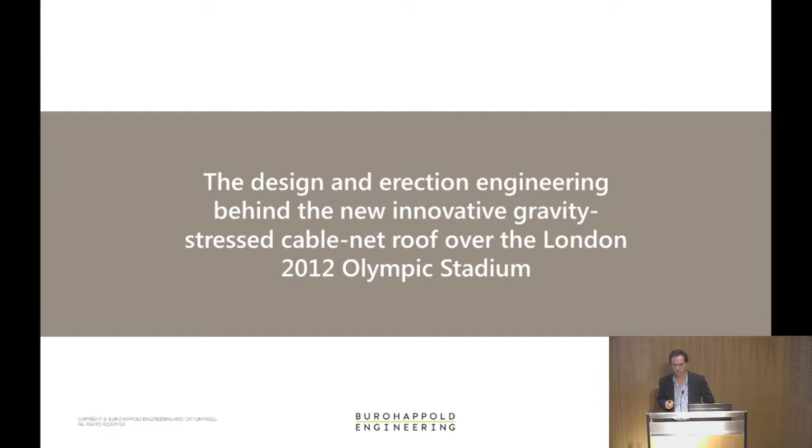My first slide is a question: how do you double the size of the Olympic Stadium roof? On its own, that's a fairly challenging question and challenge. However, you'll soon see that it wasn't just the question or the answer that was difficult. The question proved to be a little more convoluted than that along the way.

I wanted to bring you back to the heady days of the Olympics first. So it's 2012, and everyone's very excited by what the UK have been able to produce and deliver. I personally found it a real pleasure and pride to look at the Olympic Stadium being used and know that we had been part of that.

You probably also know that the original brief of the stadium was for an Olympic Stadium, a summer event stadium. The brief was that we would have a summer event where 80,000 people would be able to come and watch the Olympics. You would then go into legacy mode beyond, where 25,000 people would be able to watch further athletics events. It was to be delivered as an athletic stadium going into the future after being reduced in size to 25,000 people.

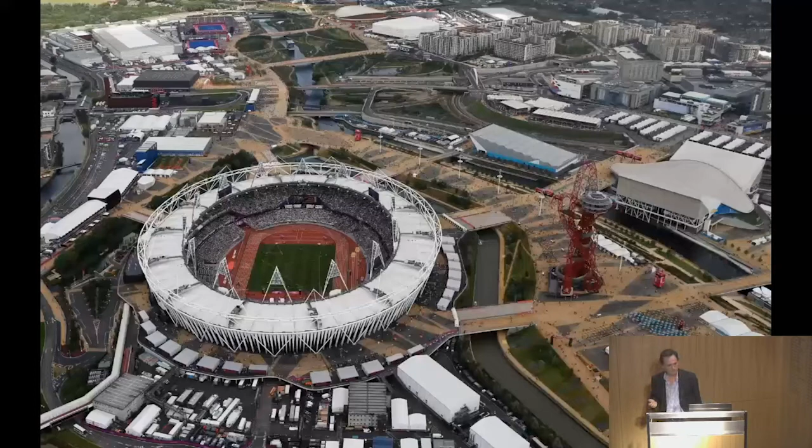So the response to that design brief was a stadium that looked very much like this. Down in the lower bowl, we had 25,000 seats. They were permanent, going to stay there for the full period of the stadium's life. We then had 55,000 seats in a dismantleable upper bowl, and there were thoughts about passing the upper bowl on to the next Olympics, letting it pass around the world as Olympics went on. Obviously, that hasn't happened. So, interestingly, we're going to talk about the roof today.

Now, the purpose of the roof wasn't to keep these guys dry - it was meant to be a summer event. The purpose of the roof primarily was to ensure that wind speeds within the athletics stadium were at a level that meant that when Usain Bolt broke the world record or whatever he was going to do, it stood - it wasn't disqualified for being over the 2.0 limit.

So we had a stadium like that to begin with, but even before this was in use, even before the games, the public and political machinations were moving at such a pace that people were beginning to say, you know what, we quite like this. It's a great stadium. We don't like the idea of building something that holds 80,000 people and then knocking it down. Unfortunately, or perhaps fortunately depending which way you look at it, there is only one way in the UK to make such a stadium not be a white elephant, and that's to say that Premiership football will be hosted there and find a tenant to play Premiership football there.

And if you're going to try and host Premiership football, you need to cover all the seats, which is where our story starts. So even before the Olympics were complete, we were beginning to look at options for covering all the seats in the stadium as it stood. And this is where the story begins.

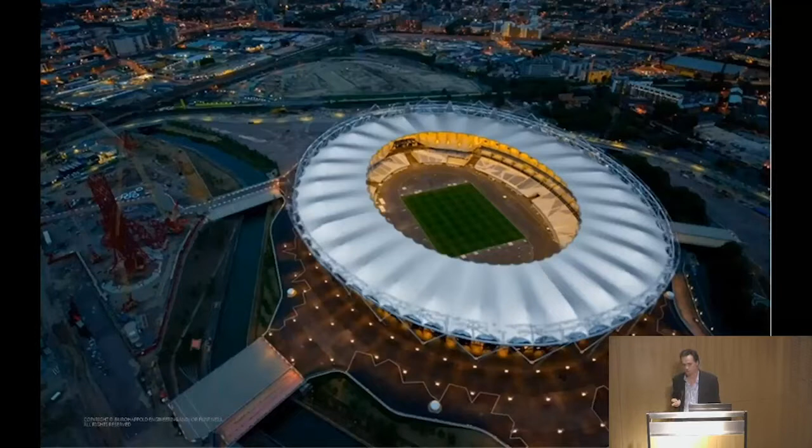One of the first reasons why that had to change was the whole political landscape keeps moving forward, and Spurs and West Ham fight it out for the tenancy rights, and West Ham eventually come out on top. Alongside that, the public are beginning to realise, oh right, we're going to play football here.

Great, it's still - we like the fact it's still an athletics track. That's right and proper. But the message from all around the world is that you can't play football with an athletics track - that just doesn't work. Particularly West Ham supporters are saying we don't want a stadium that loses its atmosphere.

So to create a stadium where football can be played, you have to start thinking about moving seats. So rather than suddenly having a situation where we just had to cover all the existing seats, we now have a situation where not only do we have to cover all the existing, but we also have to cover seats that have now moved in all the way across the athletics track. And so the roof's getting bigger and bigger and bigger. Add to that...

A requirement to host concerts, other events of that nature, and suddenly rather than having a lightweight roof, there's a quest - well, can we begin to insulate it? Can we begin to acoustically insulate the stadium and prevent some noise spill out? So, having moved to a much longer span, we're also now adding a lot of weight into the roof. So it's all the original premise of 'can we double the size' has moved on and on and on.

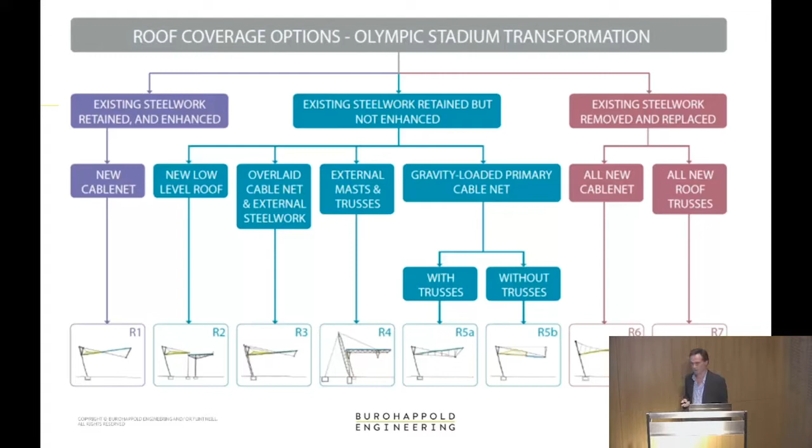Or these two options, and this is where we're going to start concentrating. Rather than telling ourselves that we've reached the limit of what the compression truss can do, we say we've only reached its limit with regard to horizontal loads. Is there a way we can reuse the capacity of the compression truss with regard to horizontal loads and carry the greater vertical loads that are now appearing? That's where we're going to move towards.

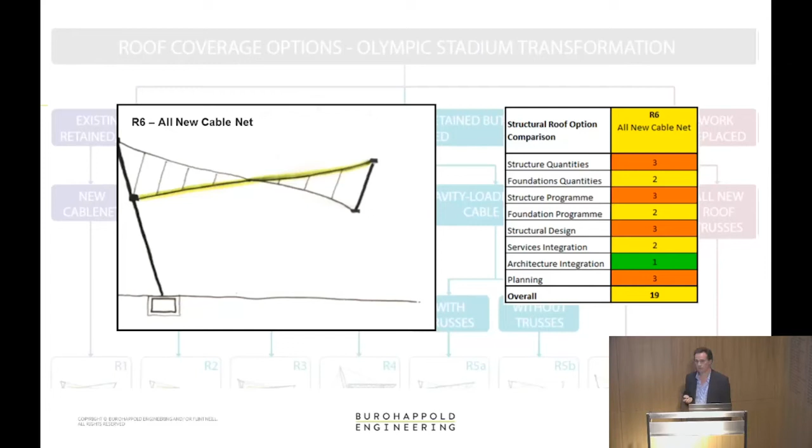It was absolutely right at this stage that a whole lot of options were scored with regard to a whole series of parameters. Some scored very badly, others, not the solutions we arrived at, scored pretty well, but weren't particularly well favoured with regard to the idea of keeping the original. Whereas coming to a gravity-stressed cable net system began to score very highly indeed, with structural design complexity being the only point where it dropped down. We couldn't let that be the reason we didn't do it.

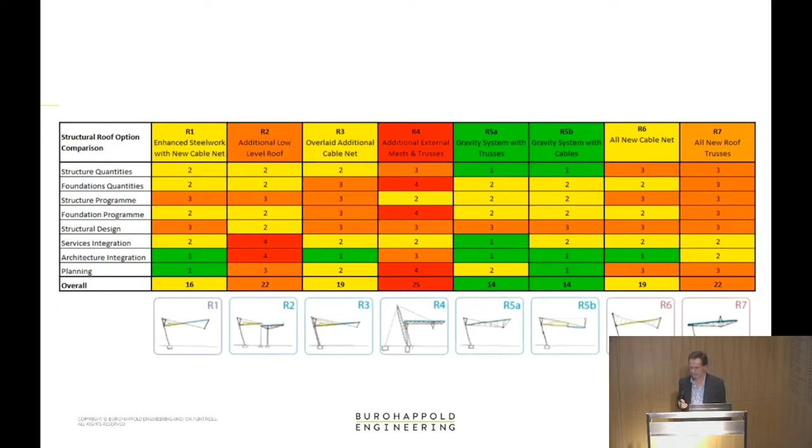So, as I say, we created a chart, presented that to the client, and it became fairly clear alongside Populous, the architects, that we could work together towards the solution everyone wanted through a gravity-stressed cable net system. I think it's the right moment to stop the story and just explain briefly what we mean by a gravity-stressed cable net system.

Most of you will be fairly comfortable with the fairly ubiquitous cable net roof system, analogous to a bicycle wheel. We have a compression truss that is like the rim, a tension ring that acts like the hub, and a series of cables acting as the spokes, putting compression into the compression ring and tension into the tension ring. The reason behind that is to carry vertical load, and the way it does so is by resisting uplift within the pre-stress when the cable runs upwards, and resisting downloads by that same pre-stress.

So what you're doing is introducing pre-stress horizontally in order to cope with vertical loads. The cables are inclined upwards and downwards to carry those loads. The move we then decided upon was, rather than having this system of cables, in the original we had a downwards cable pre-stressed against an upwards running cable, meaning upwards and downwards loads could be carried, balanced by the pre-stress.

By dropping the whole system down, we suddenly have a situation where both cables are resisting gravity vertical loads, and they're also at an inclination where they're doing that more efficiently. So the horizontal loads required in this system to carry gravity loads to begin with are equivalent to the horizontal loads in the previous system.

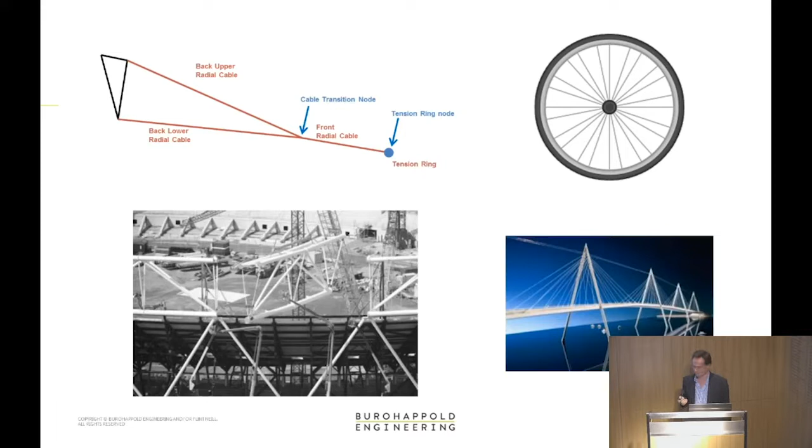And so this is what we ended up with. It's obviously very significantly longer, very significantly heavier, but by dropping the whole system down and having both cables acting against gravity, and removing the pre-stress required to act against upwards and downwards loads, we've reduced the horizontal loads back to a similar situation.

What you've probably worked out is that although we've reduced the horizontal loads, the vertical loads are still vastly increased from the original. What we found, and what Chris will describe later, is that although we managed to ensure none of the members within the compression truss needed to be changed or strengthened, we did require almost all of the columns to be replaced.

And so part of the whole construction process was to swap those columns out individually, which is quite an entertaining little bit of work as well. I probably ought to say at this stage, and Chris will say later, that although all the members were satisfactory and didn't require strengthening, a number of the connections did require strengthening, and that work was also done.

And what we're left with? Well, we're left with a system where it's quite a clear hierarchy. We've got a set of existing compression truss and columns, although the columns aren't existing. That has a series of a cable net applied to it. That cable net is stressed into position by a steel rafter system.

Now, at this stage in the design process, it's important to note that we had intentionally ensured that the steel rafter system purely spanned radially and provided a set of dead loads to the cable net system. It wasn't trying to act structurally on its own, apart from spanning. And in order to make that happen, it took on a folded shape. On top of that, with a series of purlins, and you can begin to see the folded shape of the roof, and finally the cladding.

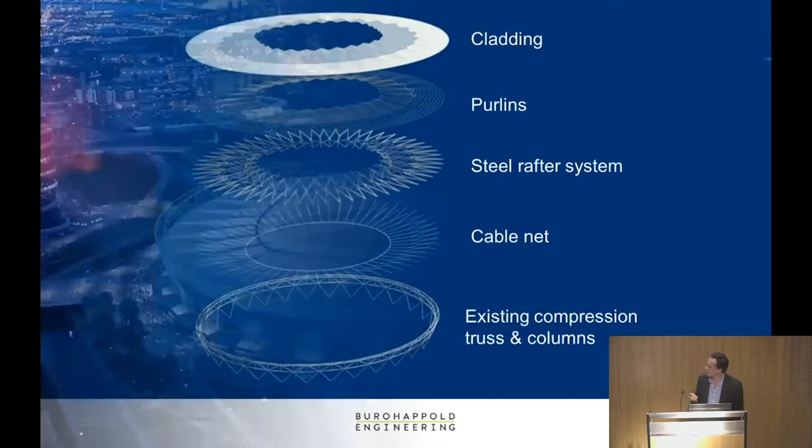So, if I then move on, that's where we had got to, and we were all very happy with this. It was a nice roof. It fitted with what Populous were aiming for. We were comfortable we could make it work with the existing compression truss.

This was about April 2013, and so on this timeline, we've obviously skipped all the way through the Olympics. We're just coming up to the last event that would be held before the chosen contractor would come and start dismantling and converting the stadium. So we're getting close, and the contractor comes on board. We get a full costing done of the situation, and there's an affordability issue.

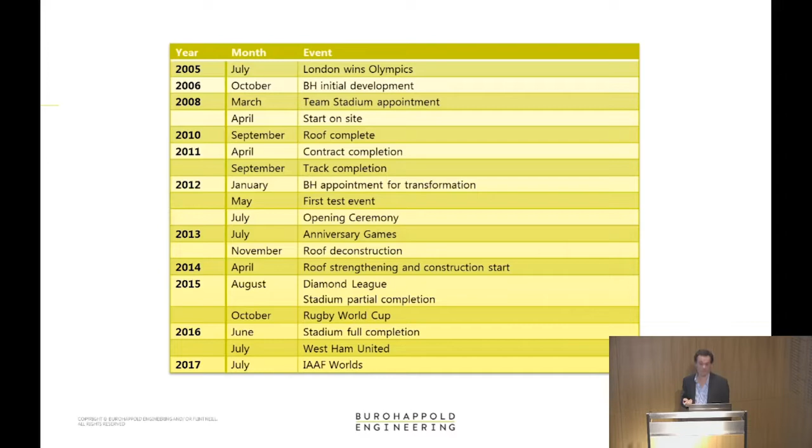So a lot of people have to, again, scratch their heads very hard and look back at what we can do. And the outcome was to look at what we had and say, well, actually, there are some complications here.

The idea of trying to ensure that the rafters don't pick up any load, or the steel roof itself doesn't pick up any additional parasitic loads, maybe isn't quite the right option. It's given us a lot of complexity in the folds within the original roof. So what can we do to simplify that? And the answer came in the form of a flat front roof.

It's actually quite conic in its shape, and so it becomes a structural element on its own. So it begins to bring in some efficiencies in those elements. They're actually doing more than just spanning radially.

We also then introduced a separation, and this is quite an interesting item. It meant that the front roof could act in that sort of diaphragm way as a cone, but the rear roof remained simple. So the rear roof just sits and loads the cable net system on its own, and you'll see through the diagrams and through the construction sequence that worked out very well.

It also meant that at this point we were having quite serious difficulties with the connection between front and back roof. The forces being generated at that point were substantial. That was causing a significant connection to be required, and that was one of the elements pushing costs right up. So by flattening out this roof, beginning to let it act in a structural fashion, and separating it from the back...

Suddenly we were beginning to get the steel tonnages a little bit lower, and also took a bit of complexity out of the whole system. And contractors were scared of complexity, so that's part of the reason why the costs were high in the first place. So where have we got to then?

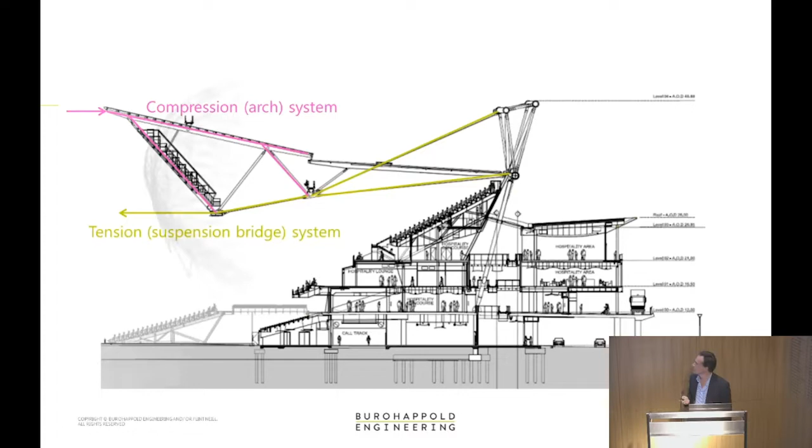This is the point where either you'll decide that was the interesting bit and go to sleep for a bit, or you've been holding out for how did they do it, how did they do the analysis? In which case, you might pick up.

It's obviously a very complex roof, a system that's absolutely interacting in all sorts of ways with itself. It's not something you can sit and take a cross section and design fully from. It's important to draw the cross section and the structural system simply, but to really get to the bottom of whether this works, whether it stands up under snow loads, wind loads, and everything else, we've got to create a complex model, and we've got to bring our architect along with us.

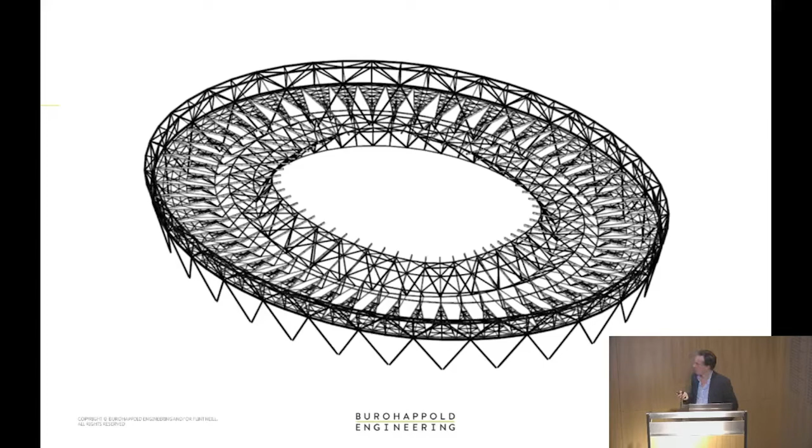One of the primary tools that's made this possible is parametric geometric modelling. This happens to be Grasshopper, though there are other ways to do the same. This scripting allows us to control and reproduce full geometric models from a series of inputs - a few slider bars, a definition of the level of the drip line, the level of the cable net, how many purlins you want. We're able to tweak the input, and a whole new stadium geometry is produced.

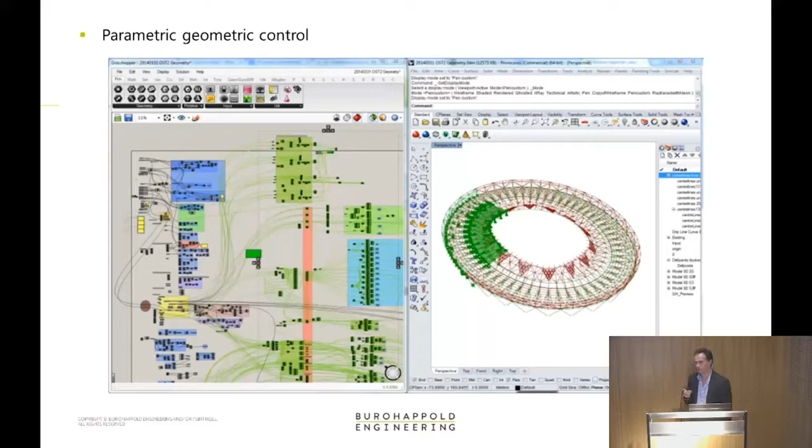Without that, the level of iteration we've been able to go through would have been impossible, and we would have been fighting against the architect, fighting against anyone who wanted to change anything, saying it has to be what it is. By allowing ourselves this kind of control over geometry, it allows the freedom to make changes as the design develops. But that's not a model in itself.

We need to take that clever parametric geometry modeling and add to it a whole lot of input data - member sizing, loading, number of load cases - all stored within Excel sheets, and those are then combined into a single analysis model.

That allows us to just batch process the whole system. We can make a small change in the geometry and rerun in a day's work rather than 3 weeks' work. We can make a small change to the loading and rerun, or a small change to either. So we've got the control to make those changes and allow iteration to happen, which allows us to create more efficiently sized members and rerun the iteration.

We finished on model 103. So we've run this full set of load cases at least 103 times, and more.

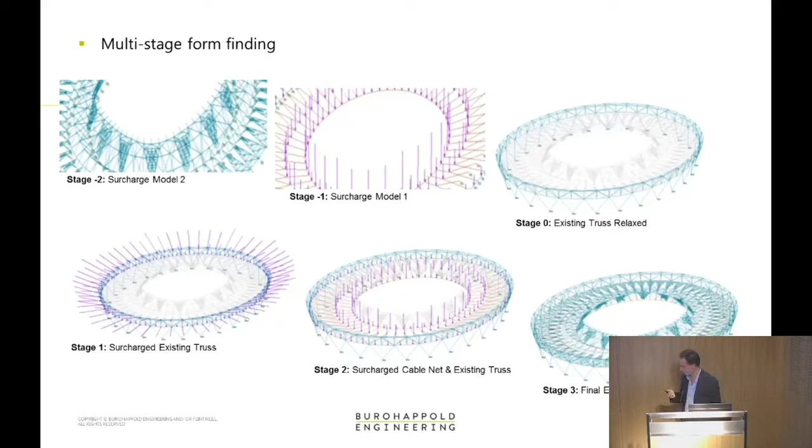Loading was absolutely key to this. In order to make the compression truss work, we managed to keep the horizontal loads to pretty much what they were previously. That's not really true - it's working harder than it was previously. We kept them within limits that were achievable, and the only way to keep them within limits that were achievable was to be very careful with loading.

The first place to be careful, obviously, is wind. This is the wind tunnel model - we used BMT to produce that and test it for a whole series of wind directions. Came up with accurate plots of wind pressures that we were able to feed directly into our design.

We also then used, due to the nature of the situation being dynamic - it wasn't just a matter of saying here's a rigid system, apply wind, put it in the wind tunnel, get the static pressures, plug it into our analysis. I won't go into it now, and I probably wouldn't be able to because I had friends doing this for me. But that conversion of the dynamic and aeroelastic effects on the structure, looking at the interaction between mode shapes of the structure and the wind pressures, meant that the dynamic pressures that would have been required are then converted to an equivalent static load for our model, and that's the load case we used.

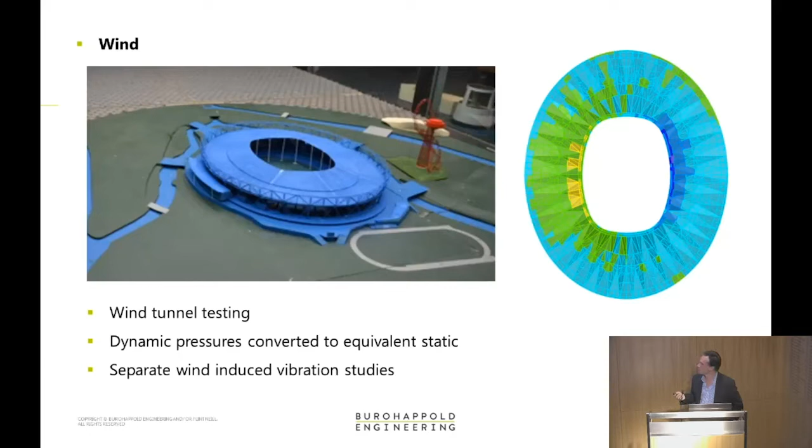The other thing to note is that there's a lot of steel up here - partly the major steel structural elements, but also everything else, so gantries, lights, gantries inside the lighting towers. There's a lot of stuff up there which, if we make estimates at the usual structural engineer's estimate of dead load, we would have been way over. It would have been fairly easy very early on to say the gantries are a kilonewton a meter, 2 kilonewtons a meter, whatever the right number is, and come back.

We said that's actually not good enough for us here. Not only because if we overestimate the dead load we'll kill our compression truss, but also the analysis model will be wrong. It'll have deflected too far, be a completely different shape, and might be carrying loads in a more effective way than it would otherwise. So making sure we had a really tight feel for the dead load of elements like gantries, purlins, and the like was key.

We always apply, obviously, a code-based 1.4, 1.35 to all our dead load elements, and very wisely most of the time. As this was a fabricated steel structure, we were very aware that we knew how heavy that steel was. For the fabricated elements, we had a Tekla model produced by the contractor, and our own modelling. We were pretty confident, to within a 2% variance range, that our fabricated steel elements at least were going to be the right weight.

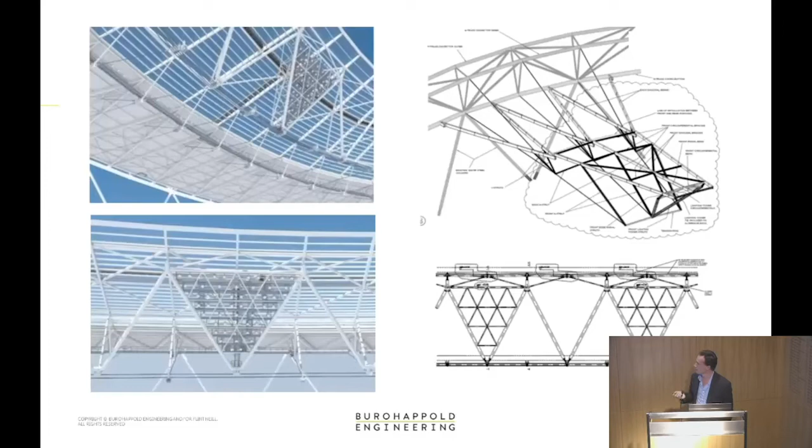A few facts, before I pass over to Chris. The whole total roof area is just under 50,000 square metres, so it's big. Total weight of steel is around 6,000 tonnes. Under the worst case snow loads, you might expect the front of the roof to deflect by around 400 millimetres, which for this kind of dynamic structure is about right. And this is the kind of natural frequency we're getting at the lowest, which is a long way below what we'd all like under normal conditions.

Before I pass on, it's worth reminding ourselves where we've come from. We've come from an Olympic stadium with a roof that covered maybe half the upper tier, a little bit more, then extended to cover all the seats as they were, and then the final push, which pushed us to think a little bit differently, covers all the seats, so it suddenly becomes a real Premiership football ground that keeps West Ham happy and can also run athletics.

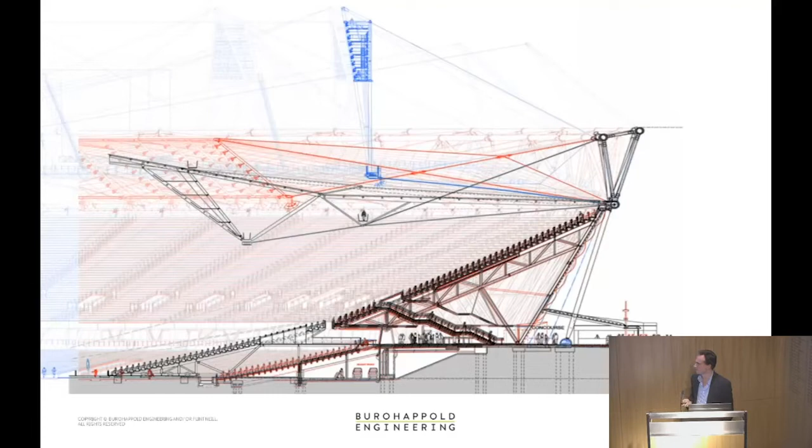At which point, I think it's time I passed over to Chris and let him talk you through some of the construction. But I will make sure I pass over to the right.

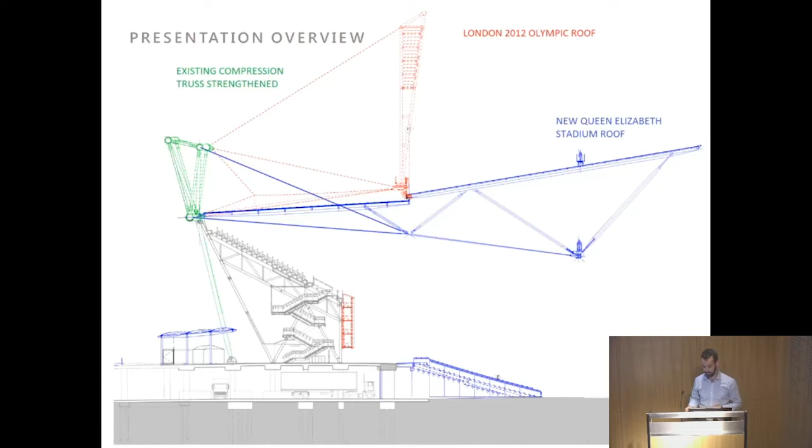We got involved around June 2013, after BuroHappold and Populous had developed a design to stage E. At that point, Balfour Beatty went through a competitive tendering process and were awarded the design and build contract by the London Legacy Development Corporation to take the project through construction. BuroHappold and Populous were retained by Balfour Beatty as permanent works designers, and we came on board to help with the erection engineering aspects.

The main subcontractors for Balfour Beatty at this point were Pfeifer, who did the cable supply and installation works, William Hare, who did the steelwork, and Lakesmere, who did the cladding.

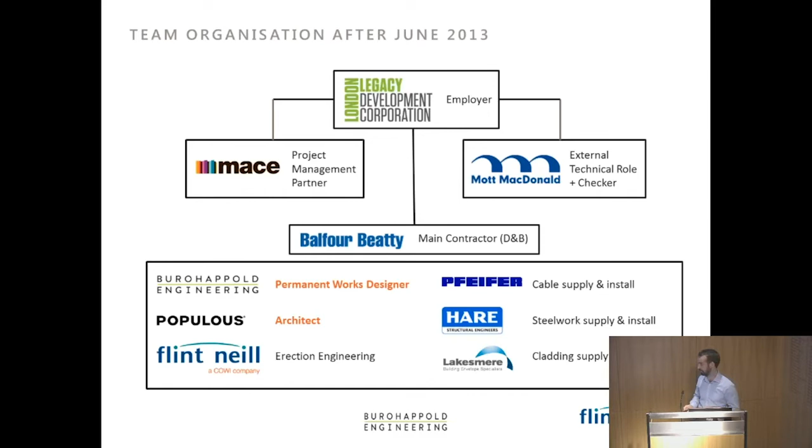In parallel with that, we started unbuilding the existing stadium roof. That took us 3 months to do, followed by 7 months of strengthening, and the total program for the construction of the new roof was just 9 months.

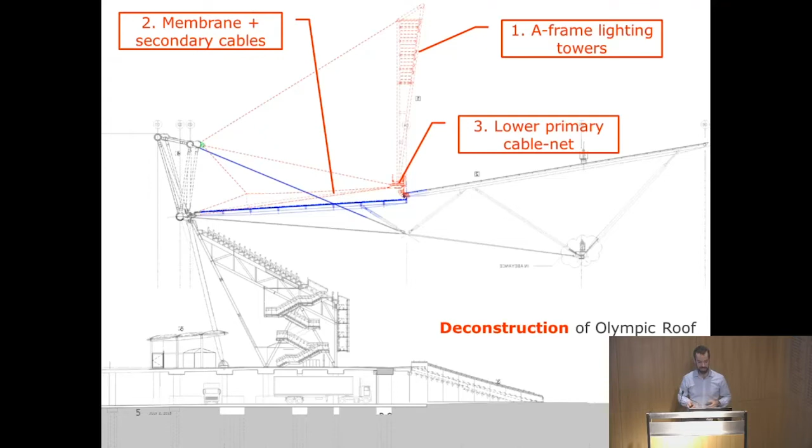So the first part of my presentation then is about deconstruction - how do we take down the old roof from the stadium? There are three key elements to it. The first is taking down the old iconic steel lighting towers, the A-frame lighting towers. The second is taking down the stressed fabric membrane, and finally lowering the cable net.

This is a view of where we started. You can see on top here, this is the first thing we had to deal with - taking down these lighting towers. 14 of them arranged on top of the existing tension ring, all linked together, and each one weighing around 40 tons.

The load path for the stability of these structures - you've got the red backstays at the back, which stop them from falling inwards, and then they're all connected together by a large circumferential cable which prevents them from falling backwards. Obviously, the circumferential cable means we can't take them down one by one because they're all connected together. So the first thing we had to do was replace that with a series of cables that spanned across the entire stadium.

So we had a sort of bicycle wheel going across the stadium, which linked the lighting towers in pairs, and all the cables came to a central node at the point. So the lighting towers are now linked together in pairs.

We had a pair of crawler cranes, 600-ton crawler cranes, servicing that, and they worked in tandem to lift down the A-frames in pairs. Once the crane had got hold and stabilised the lighting tower, the cross cables were removed, and then the lighting tower could be lifted off and down to ground.

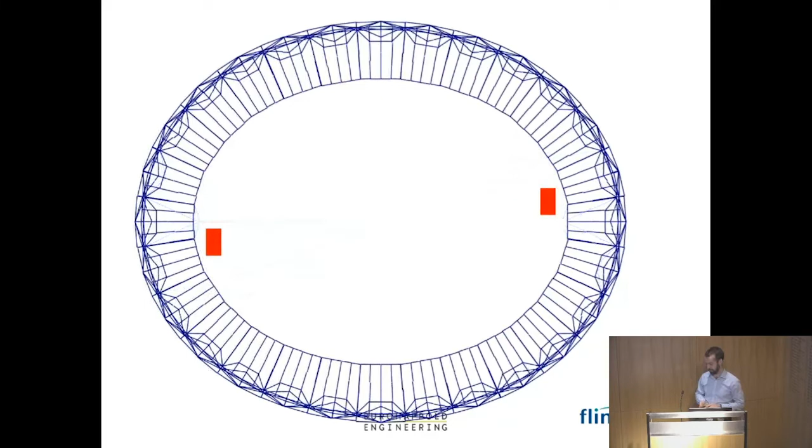And there they are, all on the ground.

The next part was relatively straightforward, taking down the stressed fabric membrane, which is supported by a secondary cable net structure above it. It worked on two construction fronts - de-stressed the cables that were supporting the fabric membrane and cut them away bay by bay.

This shows just one bay - the fabric was brought forward to the front and lowered down by a series of winches into the field of play. The fabric was taken away somewhere to the south of France, I think, and recycled.

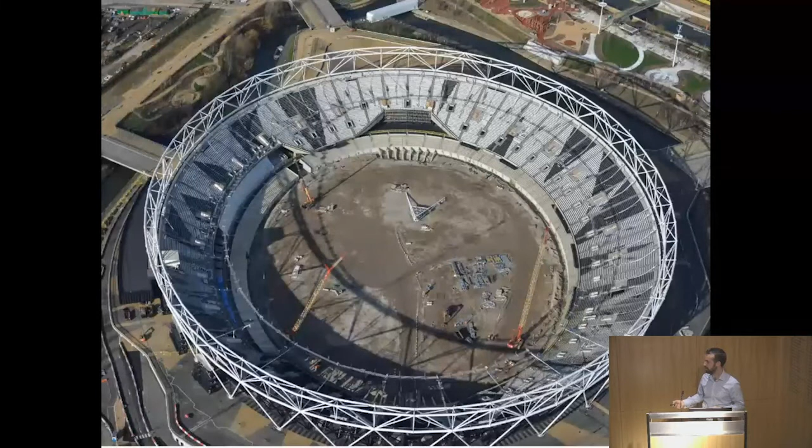The process here was sort of the opposite of the way it was lifted in the first place, but we did something fundamentally different towards the end, which I'll come on to.

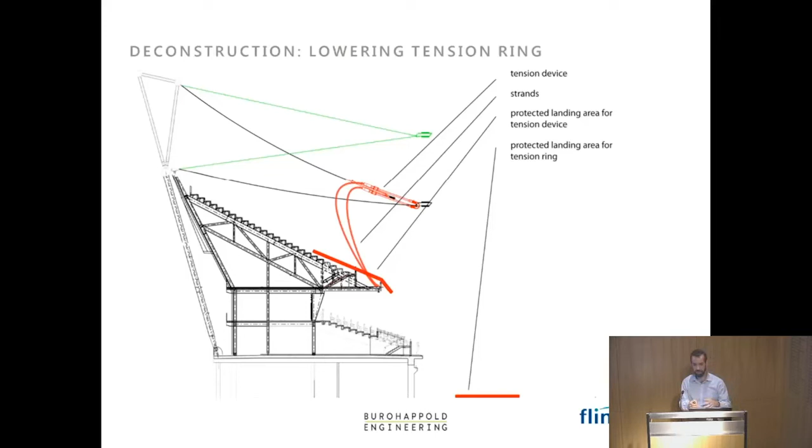As soon as that lower cable went slack, we had to remove it, because if we carried on lowering it, it would have gone tight again.

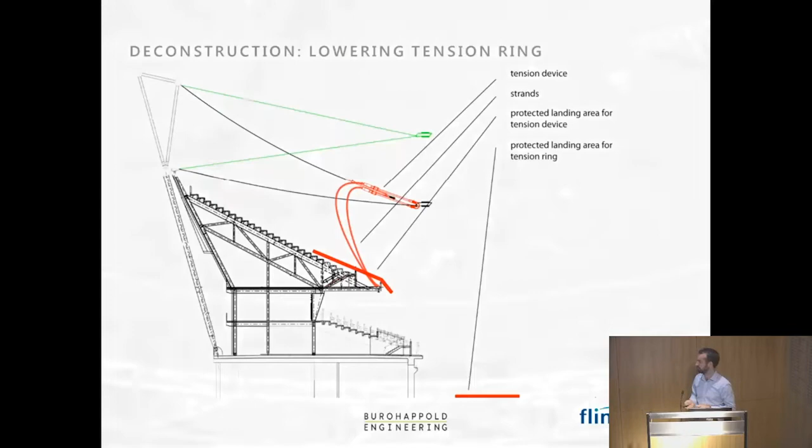One of our jobs in the analysis model was to predict very accurately where these jacks would land, and make sure we had the polystyrene blocks in the right place.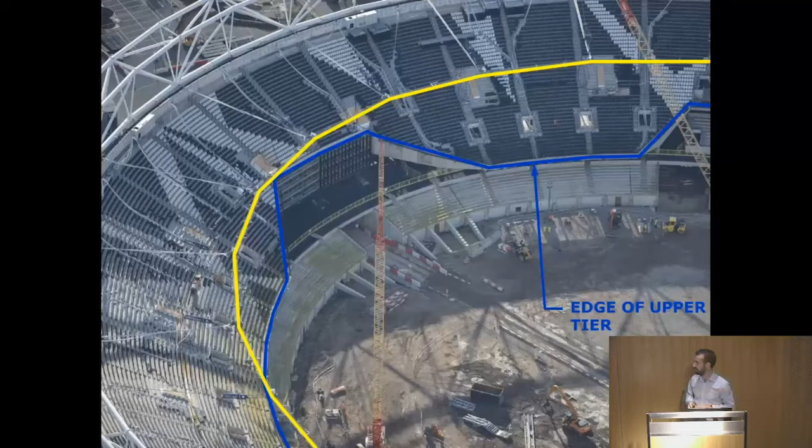We would have needed to install large amounts of scaffolding in these areas to support the tension ring as it came down. Clearly, the contractor wanted to minimize the cost and temporary works involved in this process.

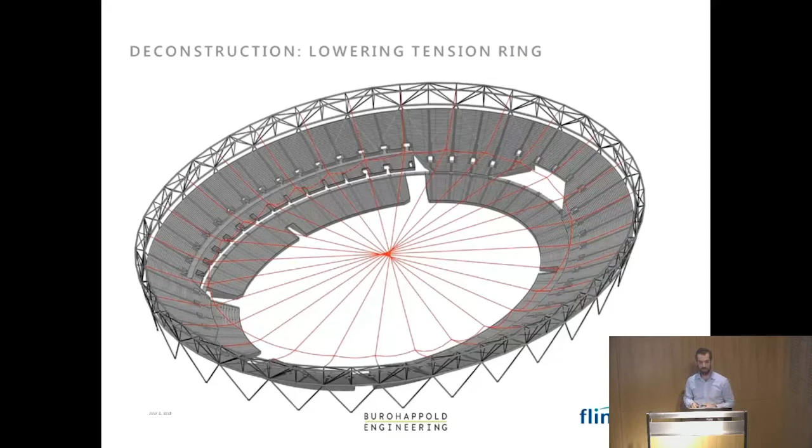This is a view from our analysis model showing what the structure looked like once we'd installed all of those brace cables. And here's a view of these crossed cables linking opposite sides of the tension ring - here are the tension ring nodes.

Clearly we have to be able to shorten those cables as we're lowering the tension ring. So the cross cable comes into a pulley block as it approaches the tension ring. There's then a sheath before the cross cable goes through a block at the tension ring, and down to a ballasted winch drum on the field of play.

By using these winches, we're able to control the lengths of these cross cables. The cross cable is shown in red there.

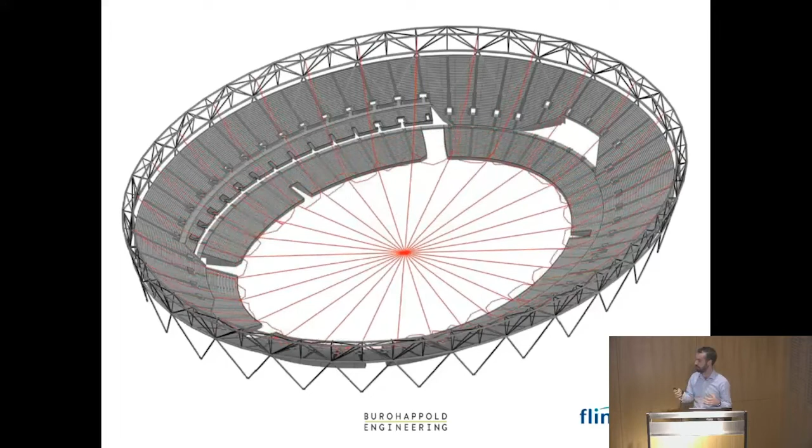So this is what the lowering of the tension ring looks like. It starts to come down. At various points in time, we remove the lower radial cables. Before we hit the upper tiers of seating, we install these cross-bracing cables, and then we start to draw in the tension ring, scoop it up. By simultaneously shortening those cross-bracing cables at the same time as we're lowering the cable, we can control where it ends up.

So that was the deconstruction of the existing stadium. We then went through a period of strengthening works. This included the replacement of all the V-columns around the outside of the stadium with larger cross-section sizes to deal with the increased vertical loads. There was also a lot of scaffolding erected around the compression truss to provide shelter for the welding activities necessary to strengthen the connections.

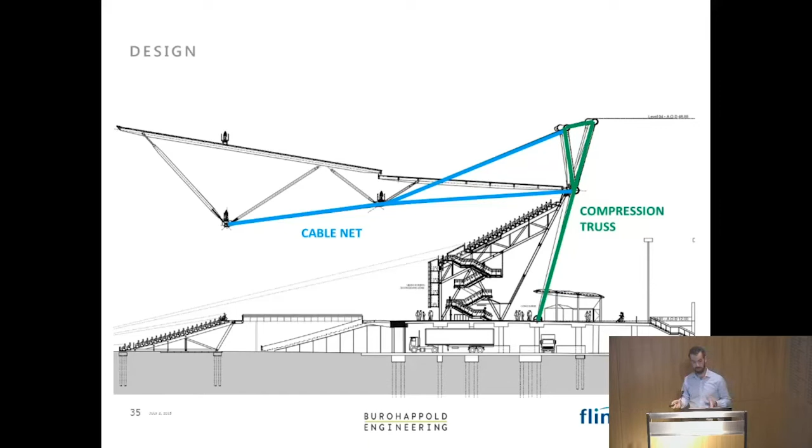The new roof was then built in three parts. The first part was putting the new cable net in. Then we erected the rear roof structure, and finally we erected the front roof. These were dealt with as three consecutive periods in the construction process.

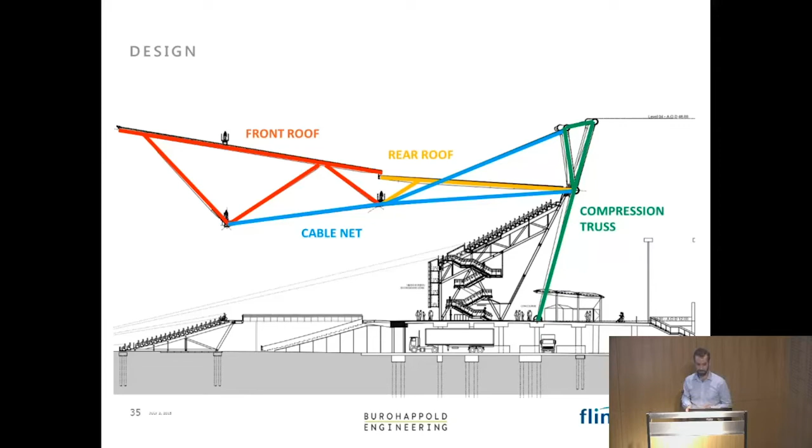Tim's already run through the design, but I'll just quickly draw out some pertinent points here. There's the cable net in blue. It has a tension ring at the front, but also an intermediate cable net node, which supports both the rear roof on the V-struts coming down off this intermediate node, and also the front roof, consisting of the lighting tower, the radial front rafter beams, and the cross bracing. That's also supported both off the intermediate cable net node and off the tension ring.

So we have, if you like, two independent structures. The structure at the back, formed of triangular modules, is articulated in the sense that each module is able to move independently of the other, so it can absorb deflections in the cable net without setting up any parasitic stresses between the different modules.

The front roof, as Tim has already explained, is different. It has continuous compression rings running all the way around the stadium, cross-braced so that the whole front roof is a continuous structure around the whole stadium. This stiffens up the response to the cable net, but it also means it picks up secondary stresses as the cable net moves.

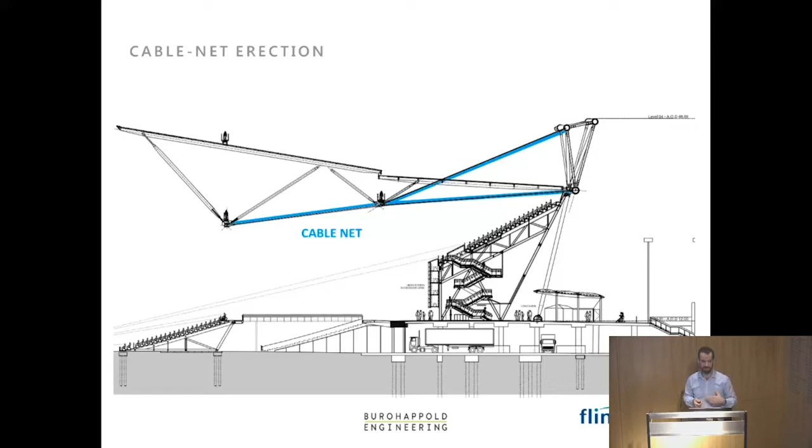Because now we were in a situation where this node is sometimes on the seating, sometimes off the seating, and in a lot of places it was very awkwardly ending up just off the upper tier of seating. So when we lifted the cable net, we would have had to have dragged this steel node up and over the seating tiers, which is difficult. It would have damaged the seating tiers, and it would have been really quite awkward.

So the first challenge was to come up with a geometry that we could lay out the cable net in, as a starting position for developing a jacking sequence that we would lift the cable net with.

This view shows the tension ring being laid out, and we actually shifted both the shape of the cable net, but we also shifted the whole tension ring to the east, which allowed us to place these intermediate cable net nodes just on the edge of the upper tier of seating here. On this side of the stadium, just out of view, they're actually on the ground. So we simplified things, and said they're either sat on the upper tier of seating or they are some way from it - they aren't in that awkward middle ground.

It made the jacking sequence more complicated, though, because a large part of the jacking operation involved then changing the shape of the cable net as we were lifting it.

This is a view of the tension ring on the ground. Brings some of the scale - unfortunately there isn't someone stood next to it, but these are very large steel elements, and the tension ring is formed of 8 lock coil strands.

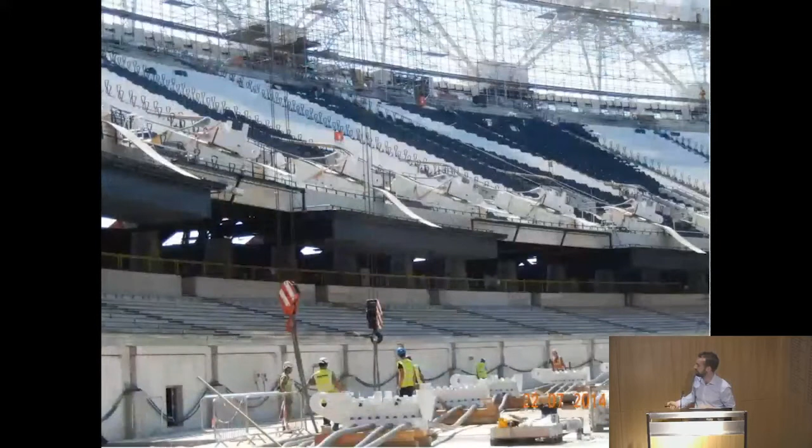This is a view - here's the tension ring elements, and here are the intermediate cable net lugs, which are perched on the end of the upper tier. And I'm pleased to say they were restrained back with temporary tethers - they didn't come shooting off the edge. But again, temporary works, very, very simple: polystyrene blocks, and just local removal of seating.

So, the first part of the lift of the cable net is to lift the cable net. And the way we did that was to place temporary strand jacks on the top chord of the compression truss up here, and use temporary strand going from that jack down and fixed to the end of the upper radial cable.

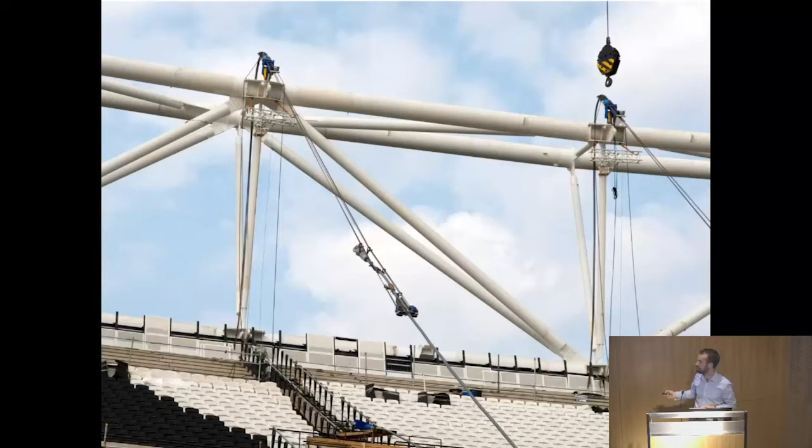This view here shows the strand jack mounted onto the top of the compression truss, the temporary strand and clamped to the end of the permanent cable.

The strand is then shortened using the strand jacks, there are 56 of them. They're all linked together hydraulically, back to a computer system run by VSL in the center of the stadium. We've given VSL our jacking sequence in a spreadsheet form, and they've entered it directly into their computer, so they can press a button and work through our jacking stages one by one. The jacks pull about 300 millimeters of strand each time in a predefined sequence which we've defined.

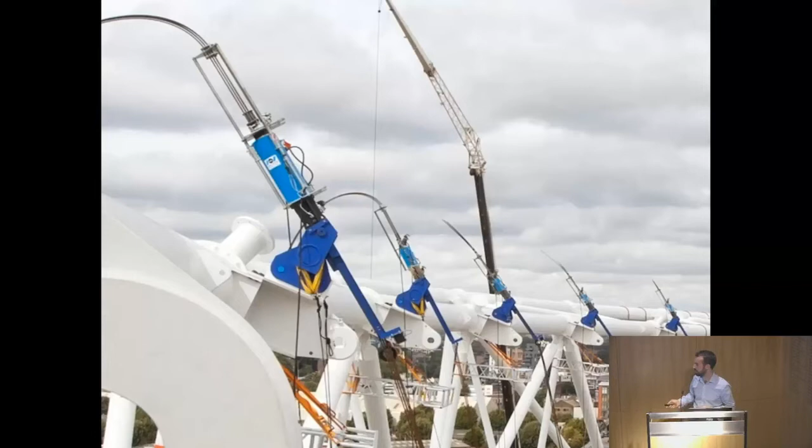This view shows the situation as we're getting towards the end of the lift on a particular grid line. Here's the jack, here's the clamp, and the final operation to fit the pin is done by hand. Another view showing a few of the strand jacks. So once we've finished the jacking operation, we fit the pins at the top.

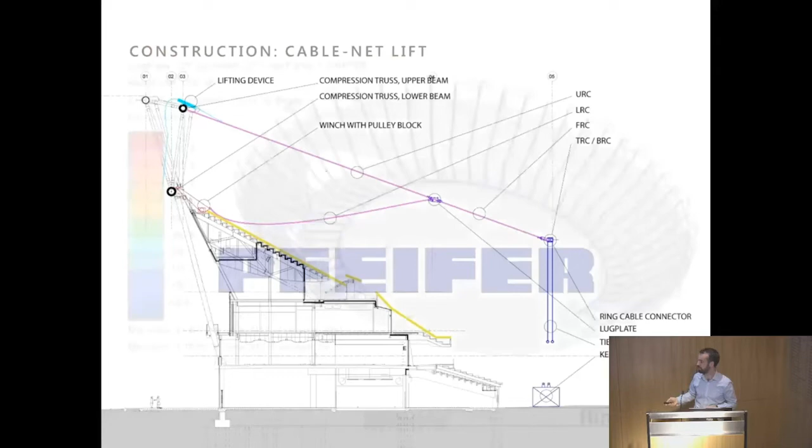The next job, having the lift complete, is to install the lower radial cables. That's done by winching in against the bottom chord until we can get close enough to fit the jacks. This slide shows a view from our analysis model of the lift, and you can see the first thing it's doing is the tension ring is changing shape and sliding along the ground. Once all the lug plates are up, we can lift freely.

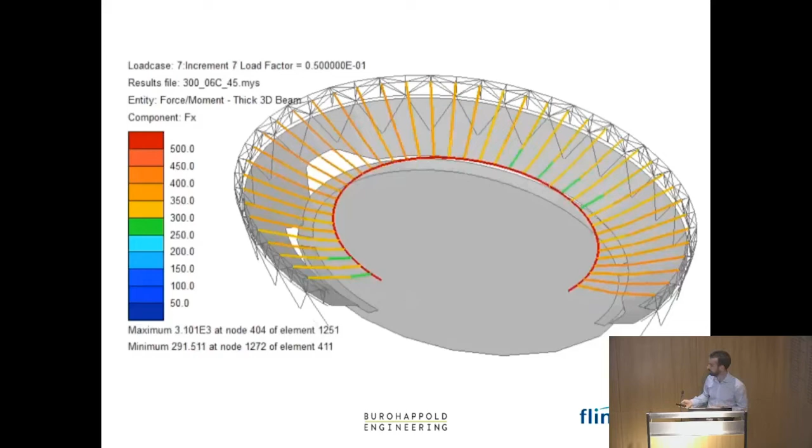That's the stressing, the tensioning of the lower radial cable, done using the winch. Once we get close enough with the lower radial cable, we're able to connect it up to these threaded rods with jacks and jack the final part of the distance we need to move. This was done on 4 construction fronts, working simultaneously and working their way around the stadium.

With those cables stressed, the tension ring is now about 2 to 2.5 meters above its final position. It's got no vertical load on it from the steelwork, so it's substantially higher than it will be in the final construction. If we were to start building the steelwork on top of it, we would have 2 to 2.5 meters of movement while building the steelwork. The effect would be that none of the steelwork would fit as we were putting it together, and the steelwork contractor would be forever on the phone.

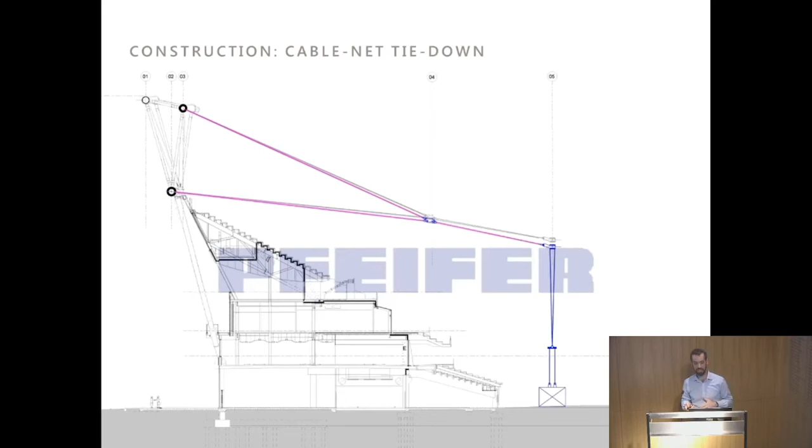So what we did here was to tie down the tension ring. Every other one of the tension ring nodes was tied down by a series of temporary tie-downs to a large kentledge block in the field of play. We tied it down to a position just above its final geometry, so we were able to pull it down by about those 2 meters.

The kentledge blocks are quite basic, each one is 135 tons of soil, manhole rings, and concrete blocks. The 2 meters were tied down by going around the stadium in 7 laps, sequentially lowering the tension ring step by step to do it in a uniform way. We weren't able to simply pull down on one grid line by 2 meters and then go to the next one, because if we pulled down 2 meters there, these two here would have flown up in the air. So we had to come up with a sequence that allowed us to do it gradually.

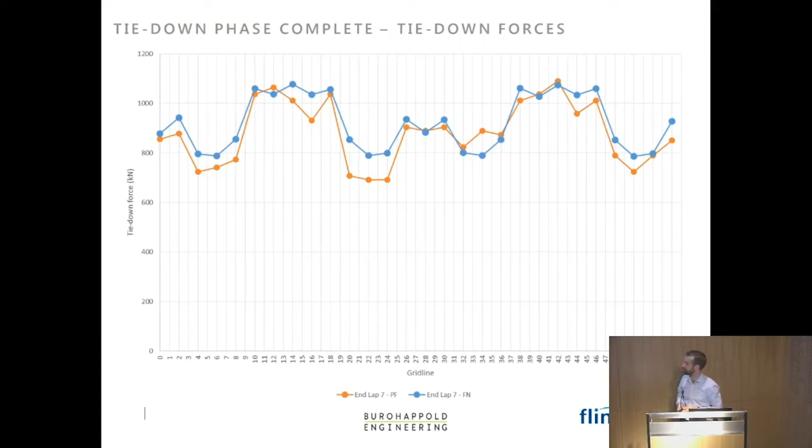I've now just got a couple of slides which show the cable net going up, stressing, and then the tying down. That goes a lot slower on my machine. And there, the Pfeifer team, having done a very good job setting the cable net, having a team photo.

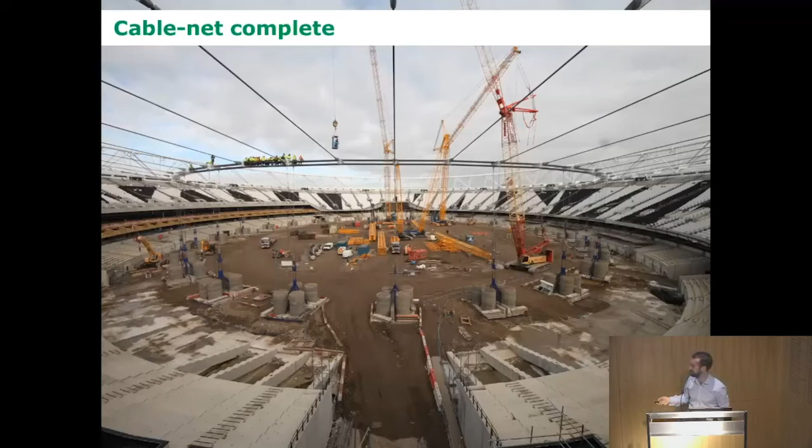So once the cable net was up, the next job was to build the rear roof structure. This was relatively straightforward because the articulation of the rear roof means each module is independent of the others. So they were erected by 3 cranes working on 2 different construction fronts. Again, this is from our analysis model, module by module, 3 cranes on each construction front, and I'll go into detail as to what each crane was doing.

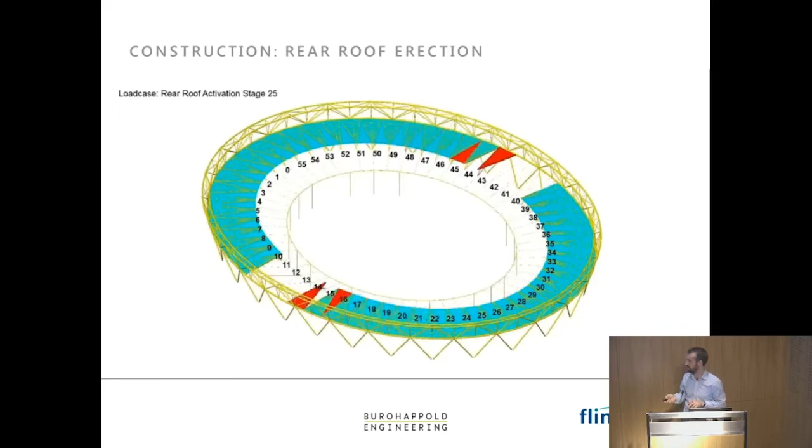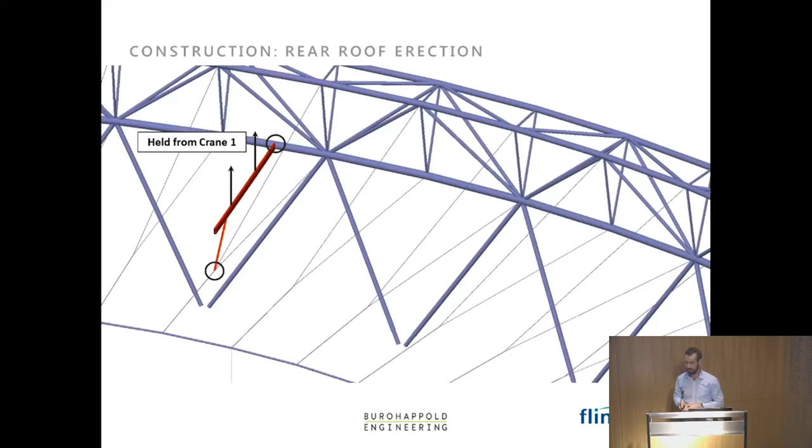But the whole of the rear roof was erected before we started anything else. So the first thing to do was to place the first back diagonal beam together with its corresponding strut that sits on the intermediate cable net node. That was then held from the first crane, whilst the second crane came in and did the same thing on the other side.

The pin connection is made and the two beams are bolted together at the end. A third crane comes along and places some temporary bracing in between the two, so that when crane one and two release their load, the structure is stable. That's then repeated for the next module, and it looks something like that.

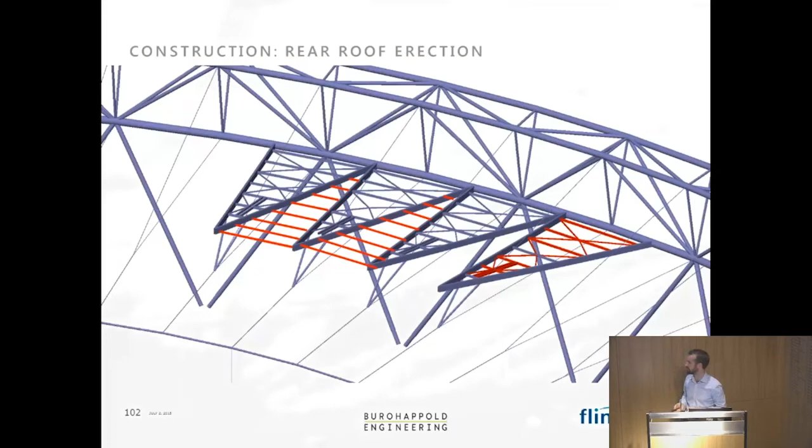After that's done, the rest of the cross bracing and super purlins are placed between the back diagonal beams, before we infill with these infill purlins. Now, these infill purlins have slotted holes at the end, so they are sliding details to allow those different rear roof modules to move independently of one another. And that's a shot with the first four up.

That progressed all the way around the stadium quite smoothly before we come to the front roof, which is a slightly more complicated affair. Just as a recap, the front roof consists of this lighting tower at the front, which is inclined in towards the field of play. It contains the lights and the PAVA equipment for the stadium. That's held in place by three of these front radial beams, and those are propped off the tension ring front and back through A-struts. Those radial beams then join all together with these continuous hoops and the cross bracing to form the diaphragm action.

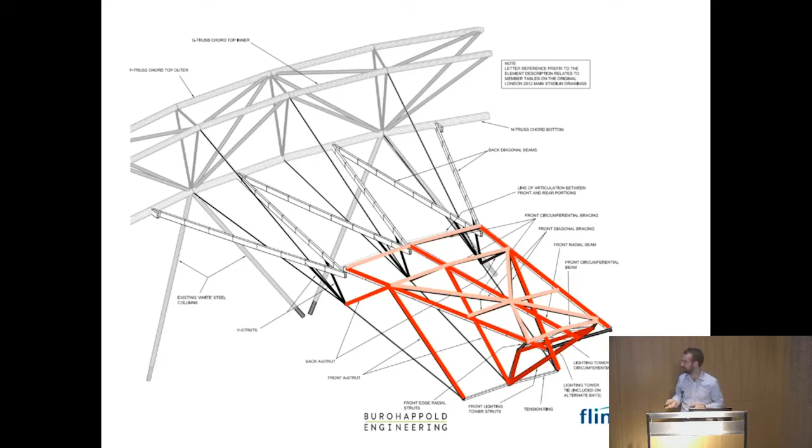Now, obviously, when you're building a structure like this, the fit-up becomes that much more complicated compared to building this structure, which is much more tolerant of movements. But we did it in the same way. We built them up as discrete lighting tower modules, again working on two construction fronts, three cranes on each, building a lighting tower and then coming back and infilling the purlin back to the adjacent towers.

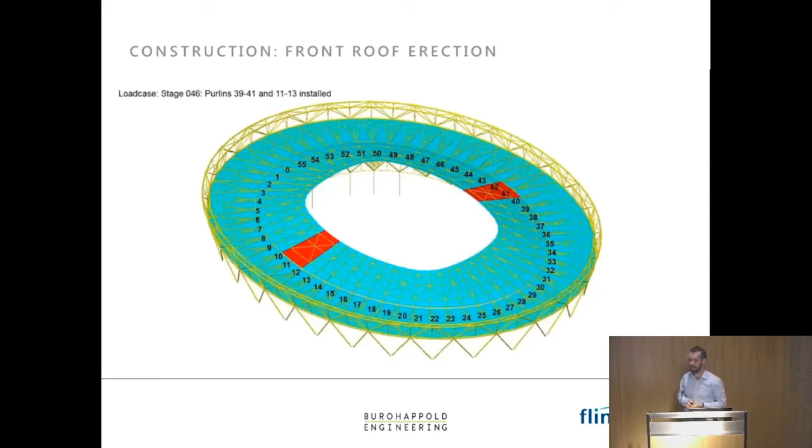All of this analysis was done on LUSAS, which is a finite element package, and we had the LUSAS finite element analysis company helping us do this, but also they were carrying out a category 2 check for us of our analysis.

So, as I alluded to, the difficulty with building the front roof is that you have these continuous rings which form secondary compression rings in the structure, and they're intended to be under compression in the permanent condition. So the completed structure has a permanent level of compression in these members. Effectively, they are pre-stressed by the cable net. So there's a challenge there: how do you get that compression into those members during the construction process?

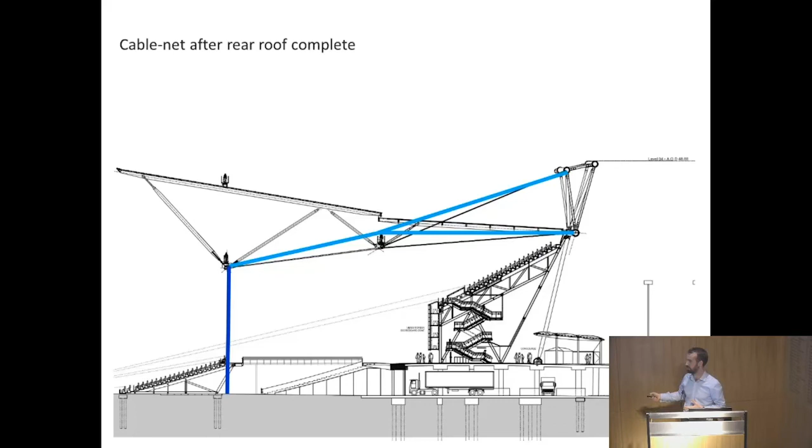This slide, I hope, tries to explain that. The blue lines show you the geometry of the cable net after we've finished building the rear roof. So the cable net's tied down, the tension ring is at its final level, but the intermediate cable net node is high. So were we to build the front roof in that condition, the front roof would be pitched forward of its final geometry.

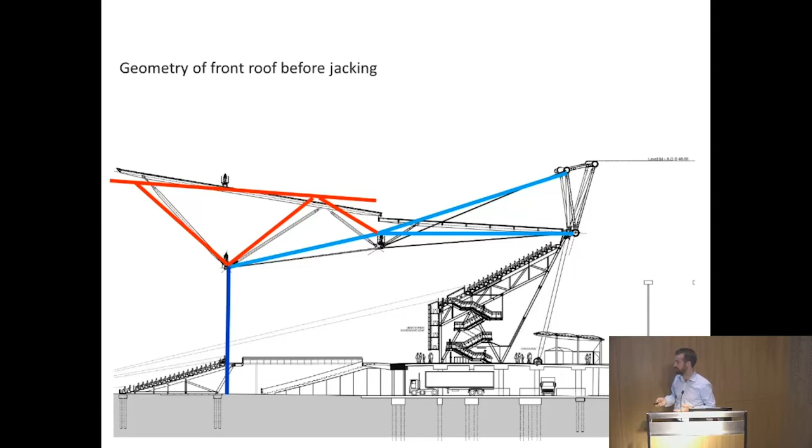That means that because these radial beams are inclined towards one another, if we tried to fit the circumferential members between these beams, they would be too long and we wouldn't be able to fit them in. So our first job was to pull back the front roof somehow.

And in pulling it back, we would push down this node and generate the pre-stress effect. The way we decided to do that, we would pull it back into its final geometry so that then the members could be fitted in. We did that by a jack which connected the front of the back roof to the back of the front roof. So in this gap between these two structures, we placed a jack on every grid line.

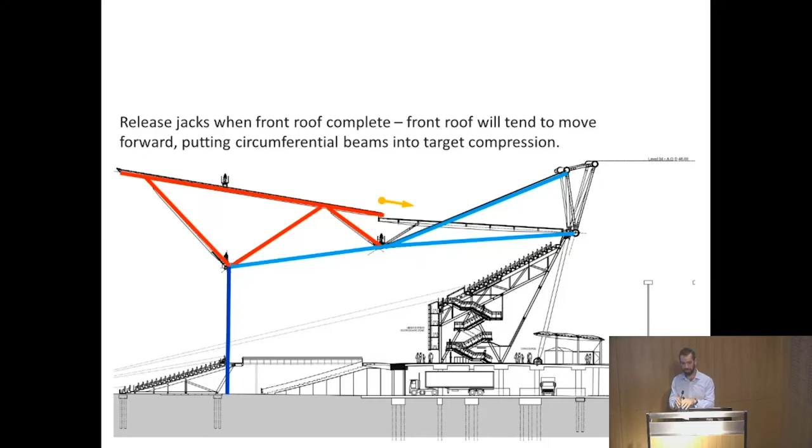During the installation of each lighting tower, we would jack it back, and we would leave the jacks. We would jack it back to a predefined geometry, which came out of the analysis model, and then we would leave those jacks in place until the front roof was complete, and then we would go through a staged process of de-stressing them.

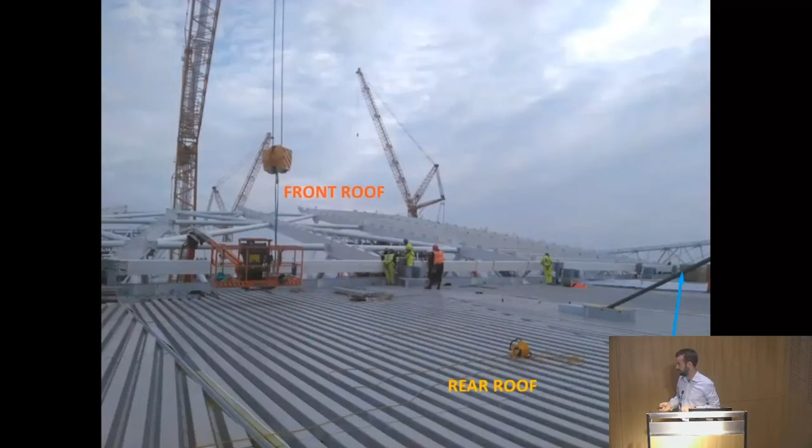This is a view stood from the top of the roof. Again, from the compression truss looking out, here's the rear roof with the cladding in place. Here's the upper radial cable going through the rear roof, and here's the front roof structure. These are the guys from Hares who are operating the jacks.

This is the module being erected, and so you have a link post jack, what we call a link post jack, on each grid line.

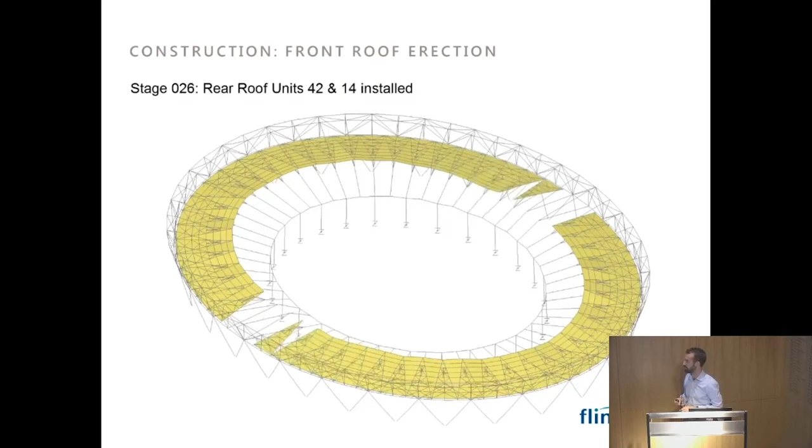This is a displacement of the structure as it's being built. You can see as we're building the rear roof modules one by one, the cable net is moving, pushing a wave in front of it. We finish the rear roof structure, then we start building the front roof.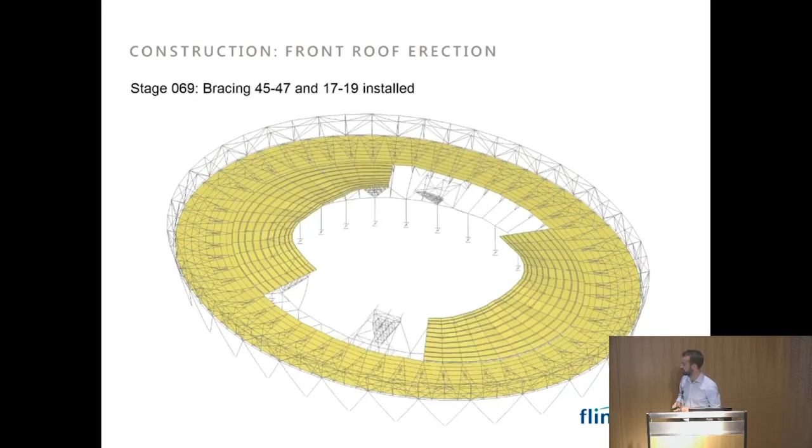You can see the amount of jacking done to pull that lighting tower module back and pre-stress it into place to allow those circumferential members to fit. And you just hope the last one fits.

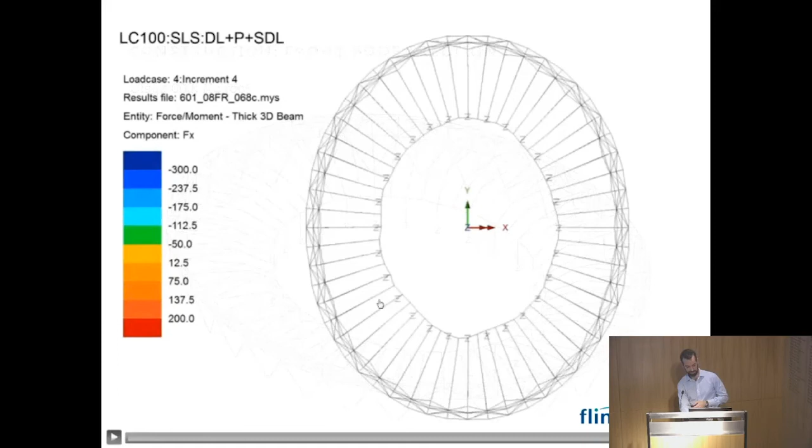Okay, this is the same sequence, but it shows you the force. So this is showing... Okay, I might not be able to show you that. Oh, yes, I can. Okay, so it's a plan view.

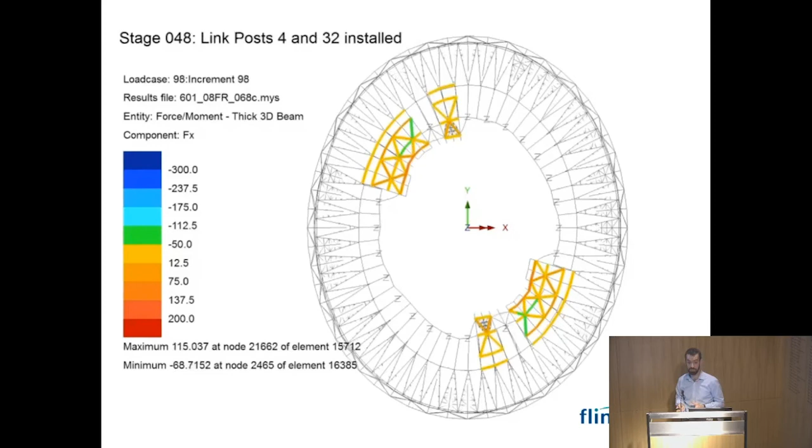If the member is orange or yellow, it demonstrates that we're able to install the members under zero force. You can see we're installing all the members under zero force as we go around because we're able to jack them back into the right geometry first. When we get to the end, there's a sequence of de-stressing those jacks, which introduces compression force into the members. That's when we detension those jacks, and those now complete rings go into compression.

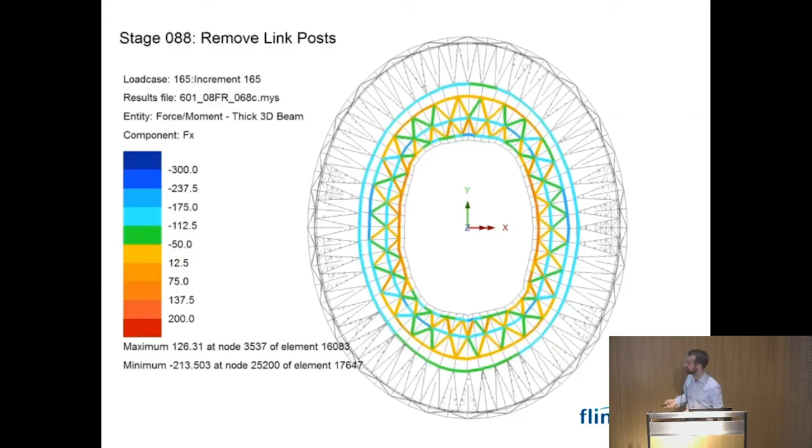Briefly, some more detail on how we erected the front roof. So the tower went up - it was lifted, prefabricated on the field of play and lifted by a single crane. This is the first one going up.

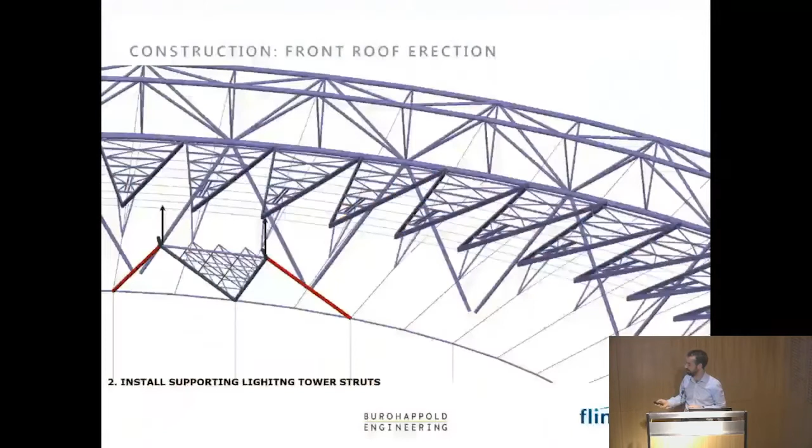That's lifted by one of these 600-ton crawler cranes and placed onto the tension ring. The pin connection's made at the base here. We then come back with a second crane and install these two supporting struts either side - there's the first one going in.

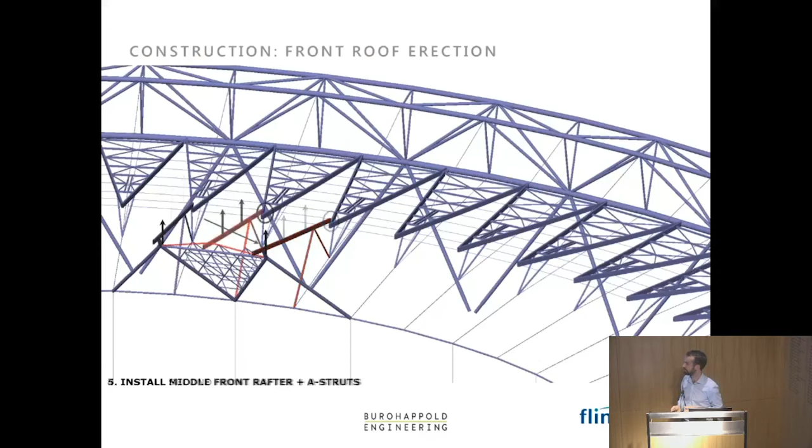Once the lighting tower and the supporting struts are in place, we can then lift in these radial beams. This part of the structure is still being held by the first crane to prevent it from falling into the field of play. The second crane is then installing these rafter beams - there's a picture of one of the rafter beams being lifted.

Once we have those rafter beams in place, they act to prevent the lighting tower from falling in. So the structure is stable in this condition, in still air conditions, which the contractor was able to control on site. At this point, the crane can then release the lighting tower.

This is installing the intermediate rafter beam. You have to have a head for heights for this.

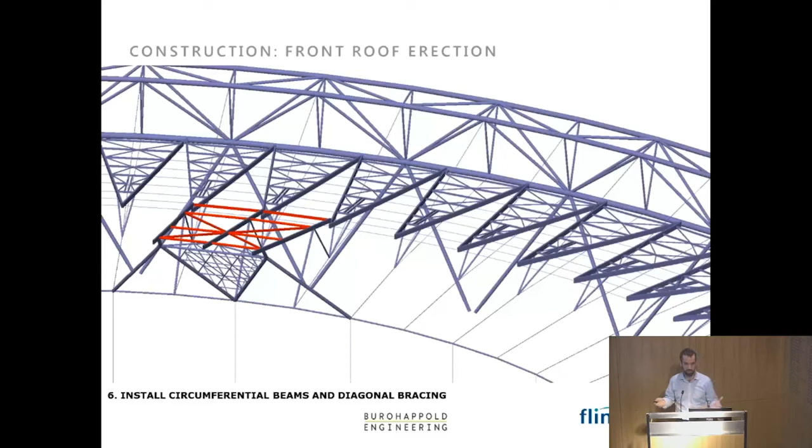Once the three radial beams are in place, the crane can come back and infill the cross bracing, and that cross bracing has to be installed inside a shift, so that we're able to leave this structure stable, subject to wind loads overnight or before the next shift starts. And that's a view of the first one. That process is then repeated for the next one before we come back and infill in between.

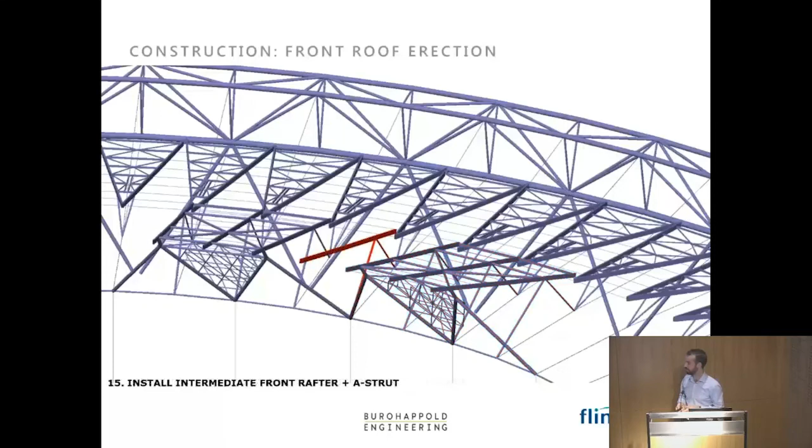Now, it's the infilling in between that's the most difficult operation to do, because you're building a steelwork structure onto a very flexible cable net. And with the best will in the world, you have a lot of construction tolerance to deal with in terms of exactly where these two steel structures are going to end up, so you don't know what the gap between them is to a very high level of accuracy.

We didn't want to adjust the lengths of any of the members, so the way we dealt with that was to use the tie downs to give us some adjustability. Remember that the tension ring is tied down at each of these nodes, and if we wanted to increase the size of this gap, we could simply use the tie downs to do that for us. So we had Pfeifer.

Pfeifer stayed on site and helped Hares with any fit-up issues that occurred. We developed some strategies for how to do that. For example, in this simple case where we want to increase the gap, rather than change the length of the member we're trying to place in there, we slacken off this tie down here and pull down harder on these two. You can see that has the effect of opening that gap. The opposite is true - if we were to pull down on this one and slacken off on these, we could close the gap. By doing that, the contractor got pretty fast and efficient at fitting up the steelwork.

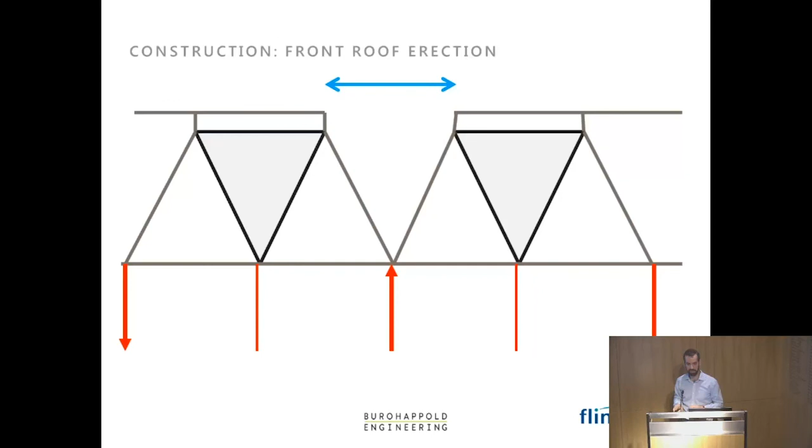I've got a final couple of slides to show you where we ended up in terms of geometry against where we predicted we would end up.

The cable net structure is a very flexible structure, and we've got a long span structure, so we're not dealing with the usual tolerances that we deal with for normal steel structures. Buro Happold had developed some guidance on tolerance, which they had made allowances for within their design, and we were aiming to achieve those.

Throughout the whole of the front roof erection, we were doing surveying with traditional surveying methods in the field of play, and we were monitoring retro targets at each of these points, A, B, C, D, E, F, and G, to control the jacking operation, making sure we were jacking it into the right place, but also to check that we were ending up in the right place.

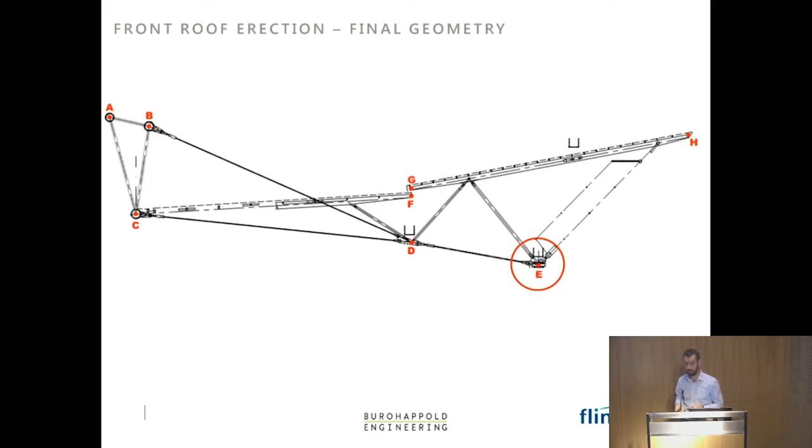So if we look at where we ended up on the tension ring, this is point E, down here, compared to where we predicted we would be right at the start of the project - taking into account all variabilities on the permanent load, which Tim alluded to in terms of the control and effort that went into controlling that permanent load. A lot of the steelwork members were weighed on the crane before they were placed on the structure. We ended up within plus minus 30 millimeters of where we should be.

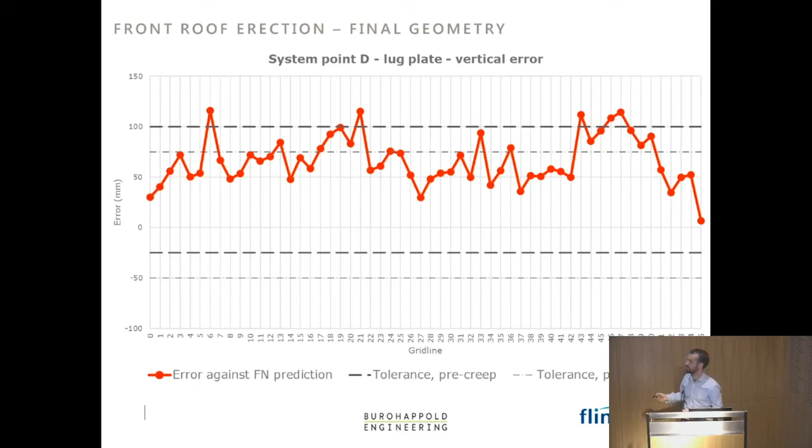The intermediate cable net node is probably the most flexible part of the structure because it has no lateral stiffness, and only a limited amount of vertical stiffness from the cable net. The tolerances here were higher as a result, so we were told to aim for plus 100 or minus 25 millimeters. The red line shows where we ended up - the vast majority within tolerance, I think a total of 5 drifted slightly out.

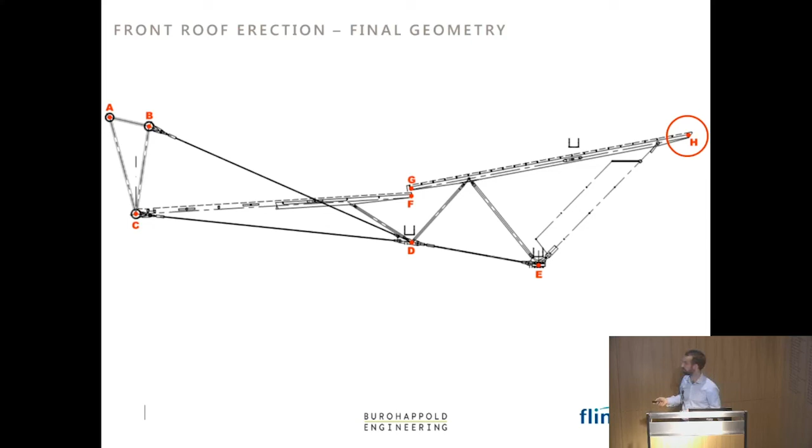The first event in the stadium is on the 24th of July, when we're having the anniversary games. Thank you very much.